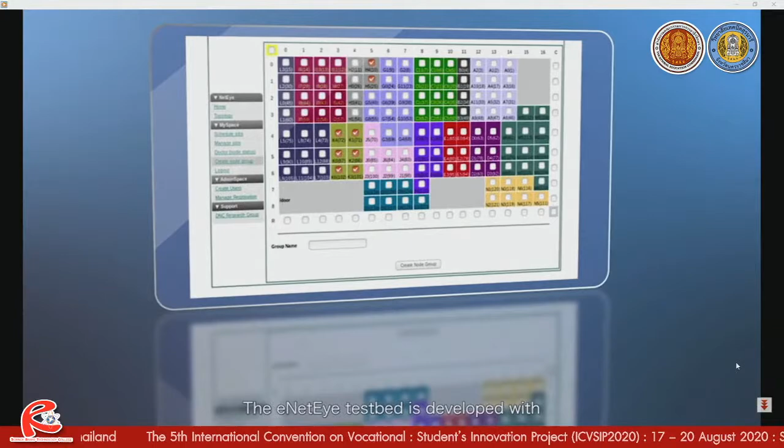More details will be described in the full paper, including eNetEye system architecture and eNetEye control software. In conclusion, the eNetEye testbed is developed with high fidelity and robustness through mechanisms such as very environment simulation capability, more on-chip resources, and more strict runtime synchronization between nodes. Highly integrated web interfaces and other tools are provided to guarantee reliable experimentation.

eNetEye has been running stably for over a year. The eNetEye software has also been successfully deployed in Chongqing University, China in 2020, and it will also be deployed in other universities in the near future.

This is the end of my presentation. Thank you for your listening. Thanks again.

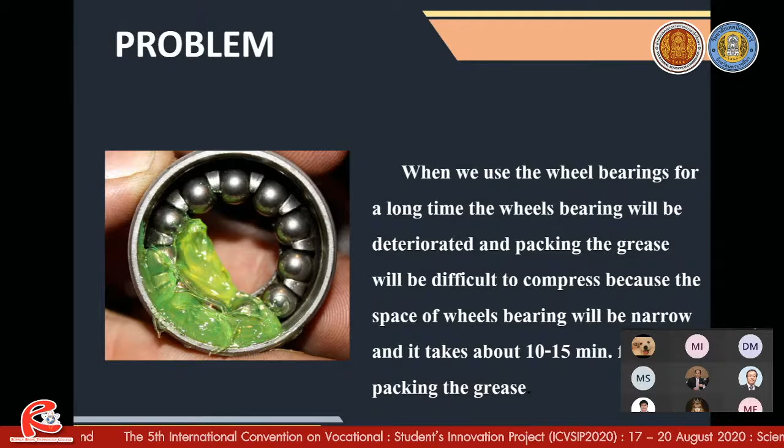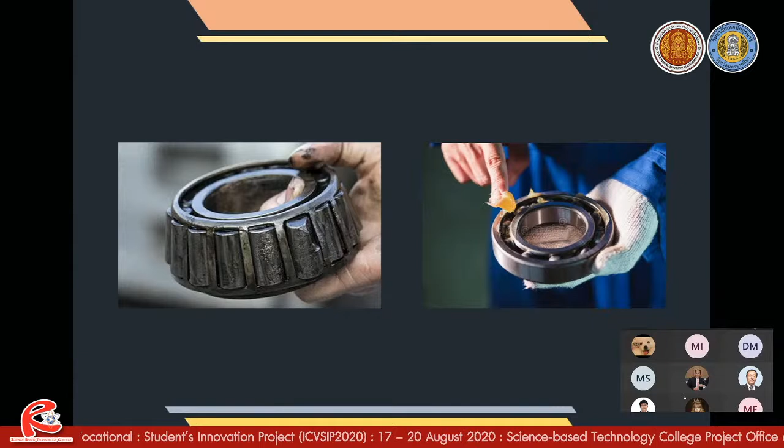According to statistics from Wards Intelligence, there are 1.32 billion cars in the world nowadays. It is undeniable that the car is one of the most important transportation systems in the world. Wheel bearings are one of the most important parts of the car, but to use them, we need to lubricate them. The unlubricated wheel bearing can cause deterioration of the wheel bearing and lead to tragic accidents and breakdown.

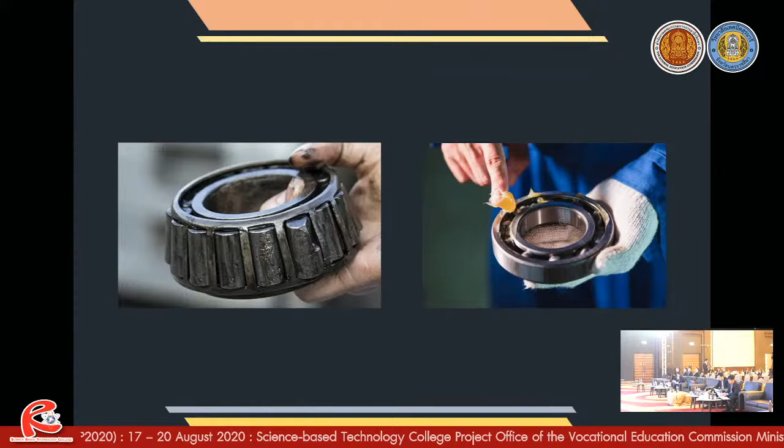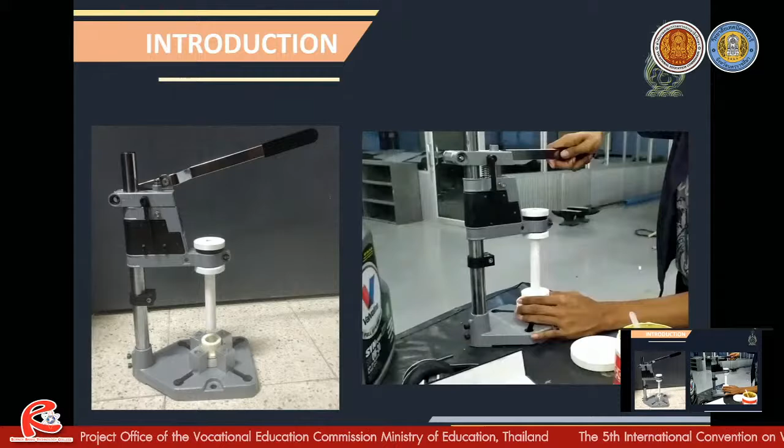But how do we normally pack grease into the wheel bearing? Normally we use our hands, which takes a lot of time and can be a cause of cancer. So we proudly introduce our invention, the wheel bearing greasing machine, that can facilitate our user and make packing the grease into the wheel bearing a lot easier.

Benefits: our invention has a lot of benefits, such as first, it shortens the time for packing the grease. Second, packing the grease will be easier. And third, it's easy to use and more convenient.

The scope of research: first, workpiece. Our workpiece has a size of 15 by 20 centimeters and 40 centimeters height. Scope of experiment: we tested with wheel bearings from trucks, 4-wheel drive and 2-wheel drive vehicles. Scope of location: we tested at Science-Based Technology Vocational College, Chonburi.

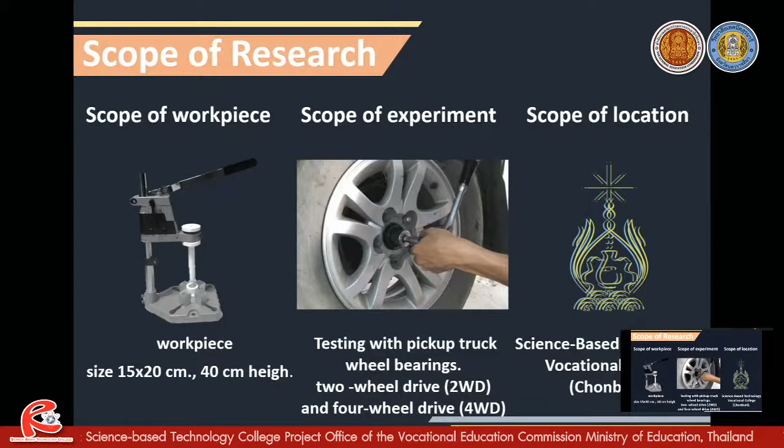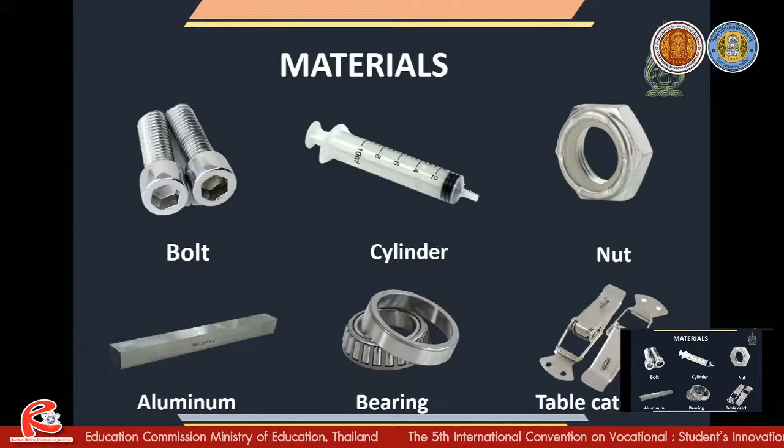So let's see how we built it, with Mr. Siraset Insunthorn. First of all, let's see our materials: bolt, cylinder, nut, aluminum, bearing, and a table catch.

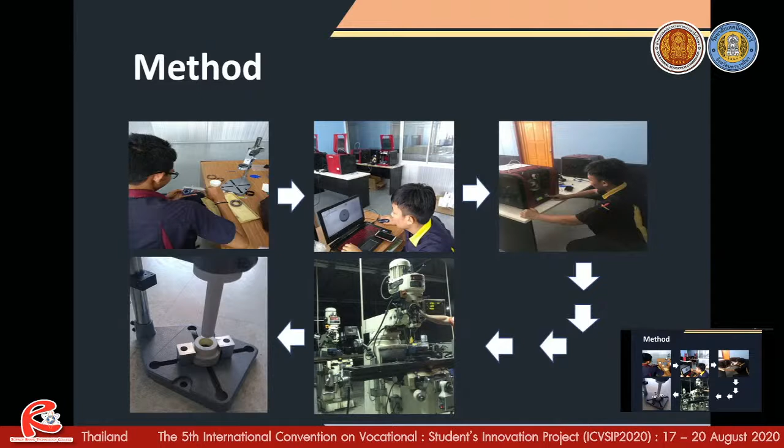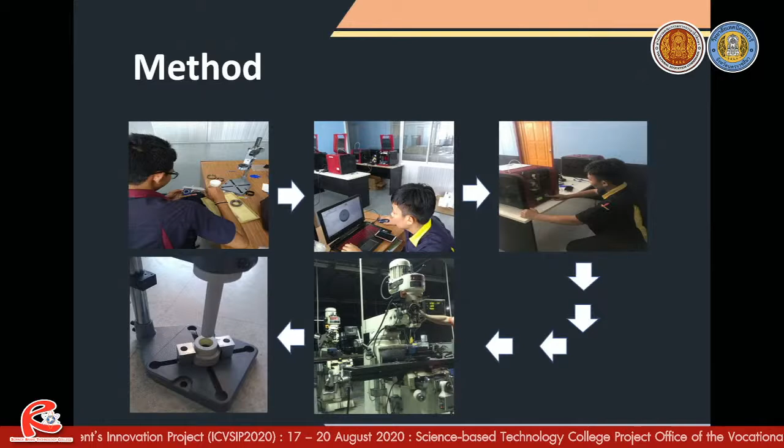Next, the method. First, we measure the wheel bearing with a vernier caliper. Second, we design the wheel bearing grease machine version 2 with the SolidWorks program. Third, we print the parts of our invention with a 3D printer. Fourth, we make the holder for the wheel bearing. And last, we test the wheel bearing grease machine version 2.

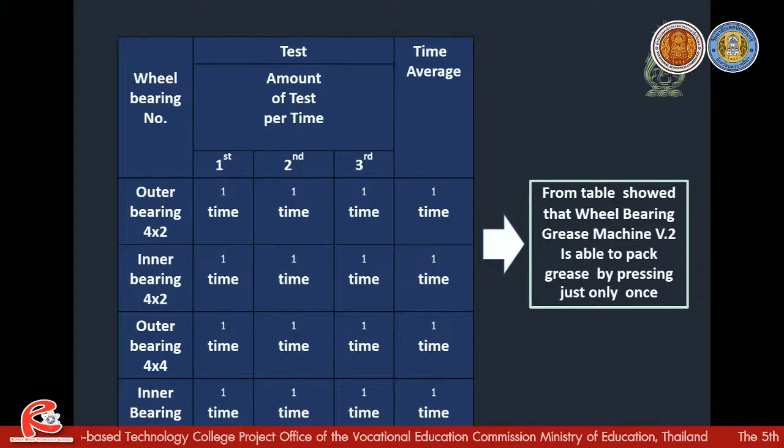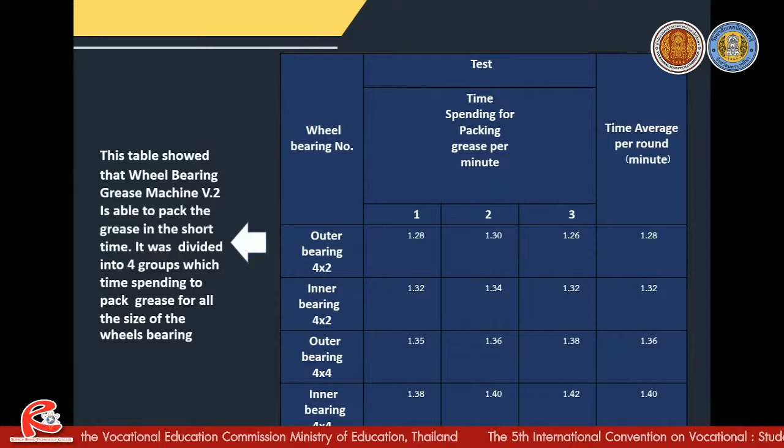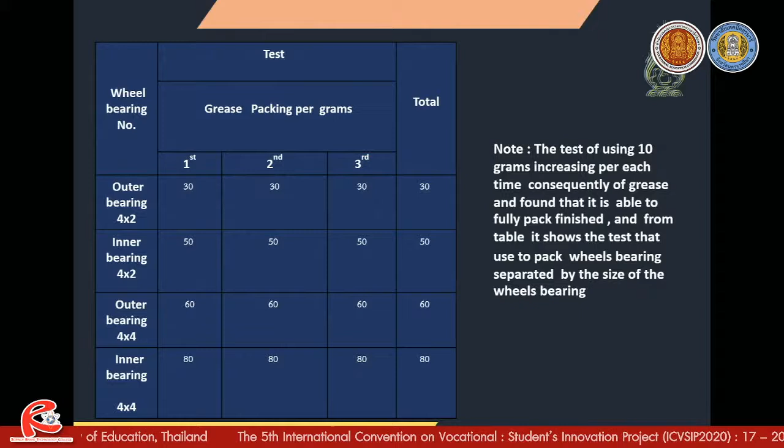Next, this is the table we kept from our test. From the first table, we can see the wheel bearing grease machine version 2 is able to pack grease by pressing just once. The second table shows the average time using our invention to pack the grease, divided into 4 groups of wheel bearings. And the last table shows that we put 10 grams of grease per each time to find the amount of grease that can fully pack the wheel bearing.

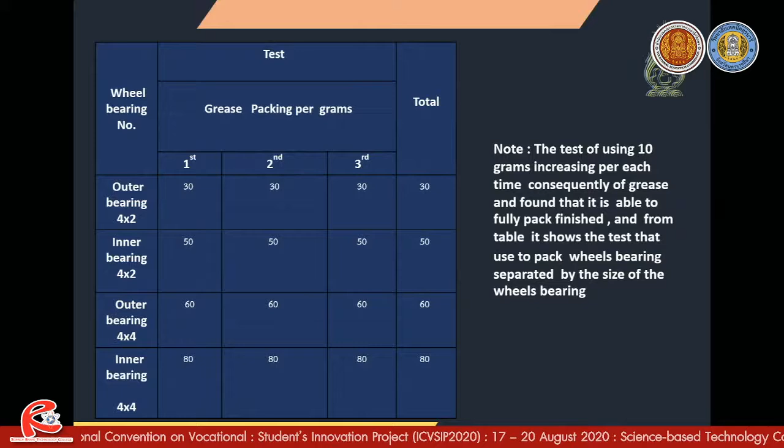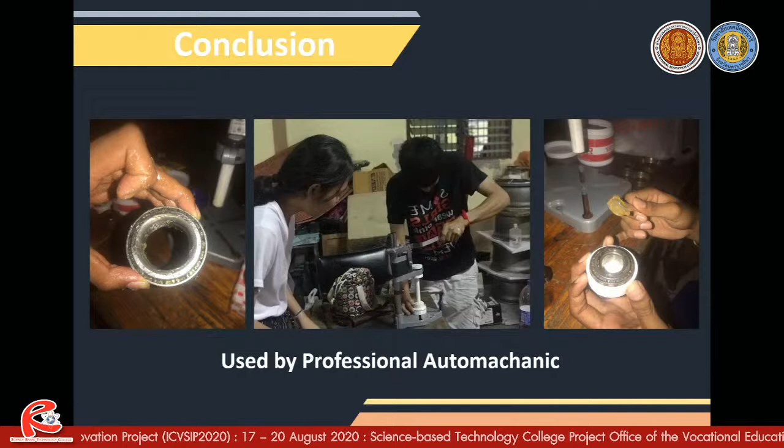To make it the perfect invention, we brought our invention to be tested by a professional auto mechanic at a local garage in Pan Thong City, Chonburi. The feedback from him was that our invention can save a lot of time for him in good condition and can really facilitate him.

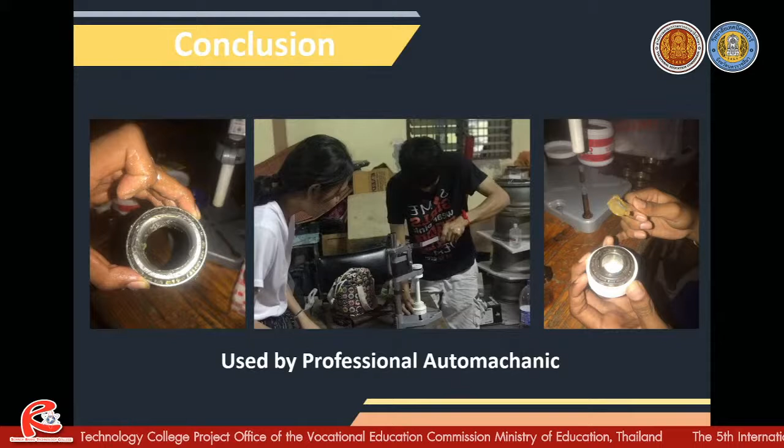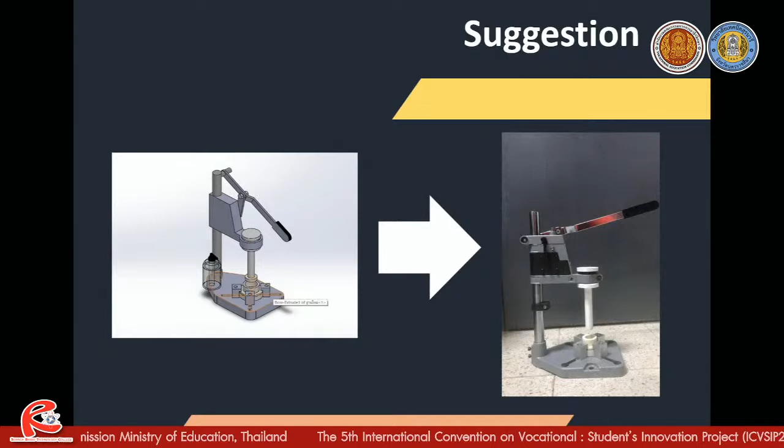As a suggestion, if we have more budget and more time, we would like to continue developing our invention, because invention cannot stop. So we're going to put in a hydraulic system and an automation system to make it more facilitating and easier to use. Thank you for your attention.

Okay, thank you very much for your presentation. Do you have any comparison in terms of the time for working, compared between doing it manually and working by using your invention? Because in your table you show only the time that you use with your equipment.

Okay, so for the time used to pack the wheel bearing: first, if the person packing the grease into the wheel bearing is a non-experienced auto mechanic or a student, it will cost about 5 minutes. And if they were an experienced auto mechanic, it would take 2 or 3 minutes. But with our invention, it costs only 1 minute 30 seconds on average. So it can save a lot of time.

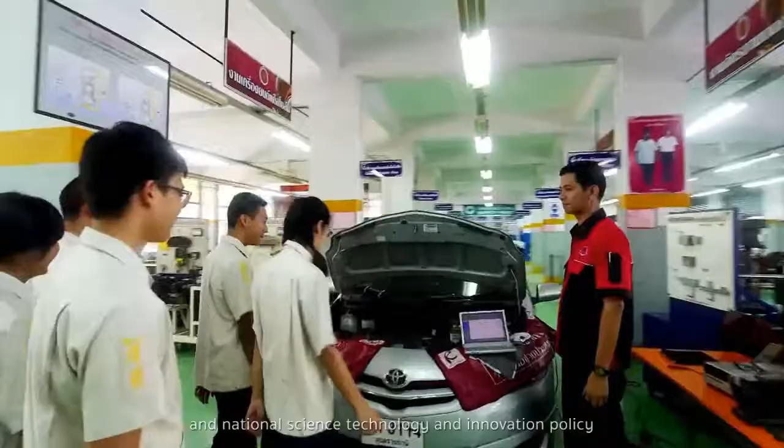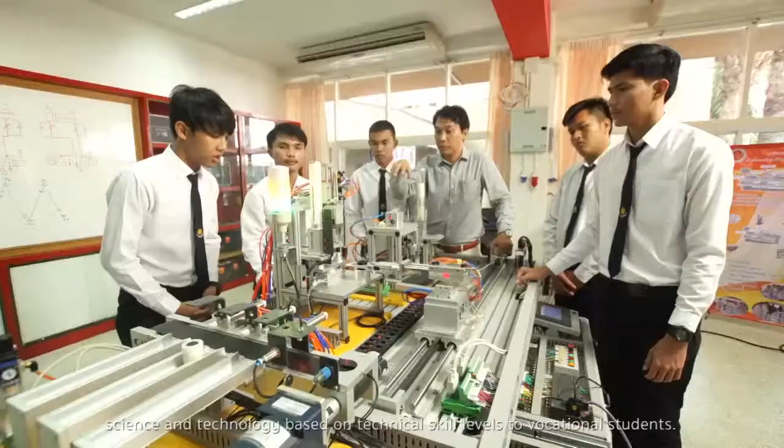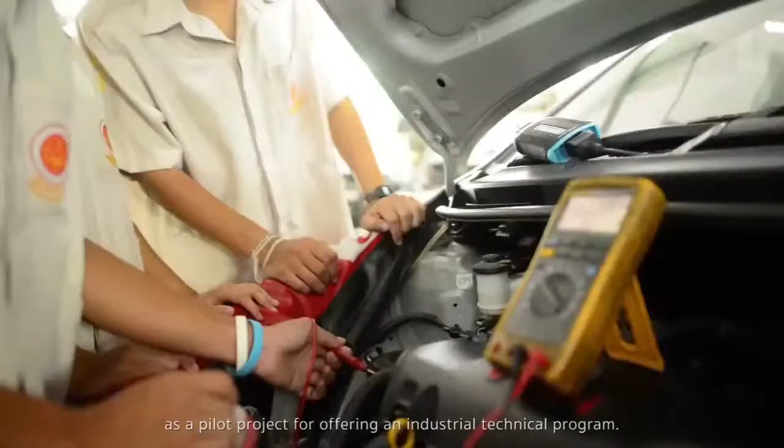Since 2008, the Office of Vocational Education Commission and National Science, Technology and Innovation Policy have developed a new project delivering excellent innovative science and technology based on technical skill levels to vocational students. In response, the Technical Vocational College in Chonburi Province was first implemented as a pilot project offering an industrial technical program. In 2010, this project was extended to 4 technical colleges.

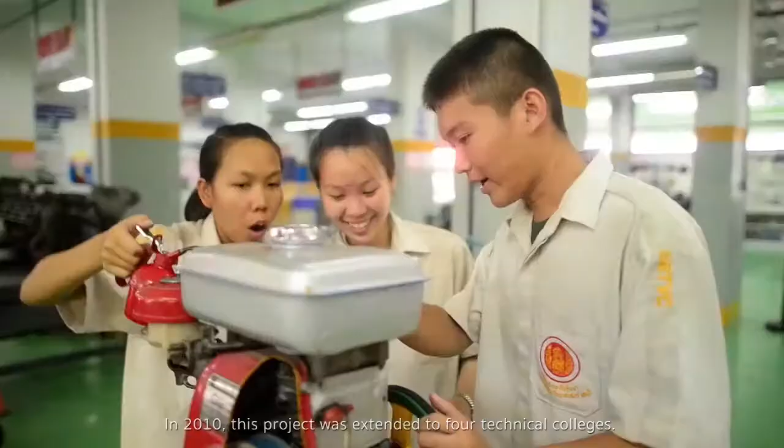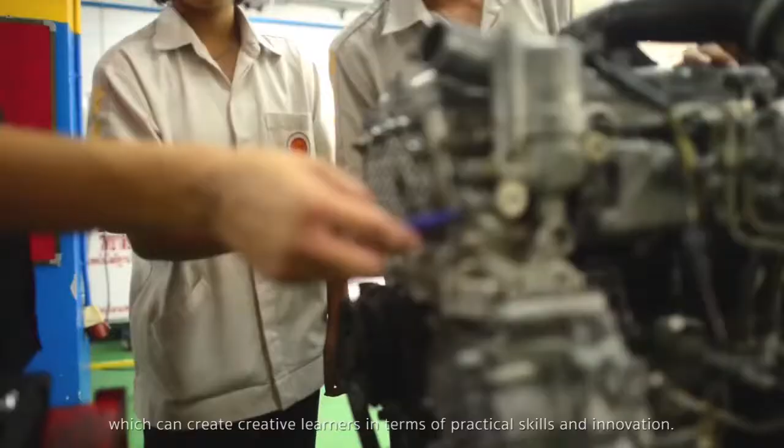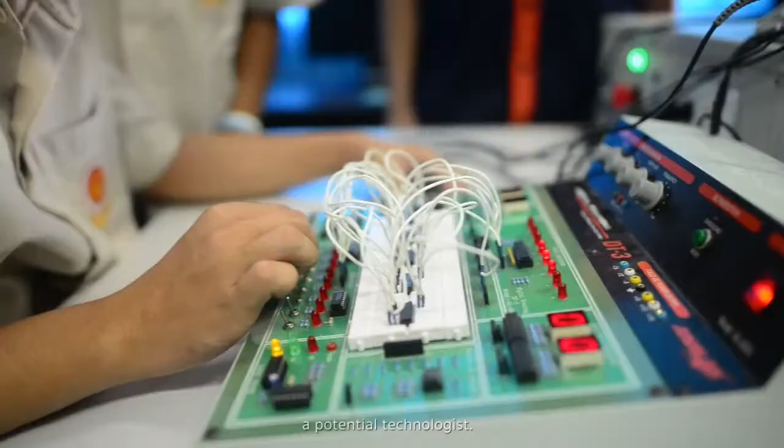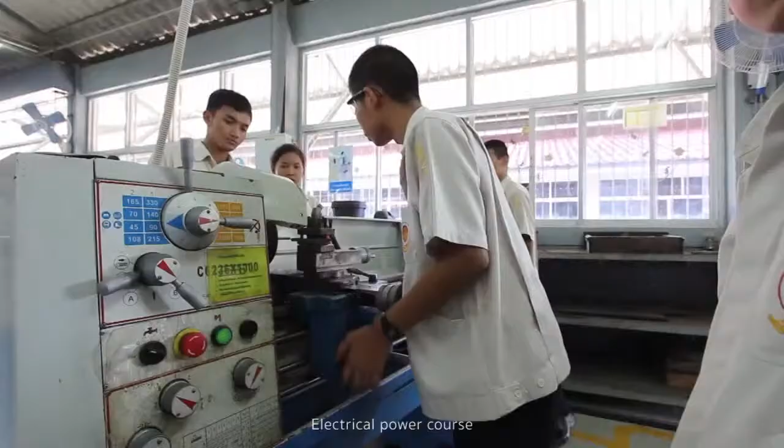Chonburi Vocational College: we believe that genius in technologies can build. This college provides vocational knowledge combined with science and technology, creating learners with practical skill and innovation. The college aims to produce students who become young inventors and ultimately potential technologists. Open courses include science-based industry technician courses: automobile, electrical power, machine tool, automation, and electronic courses.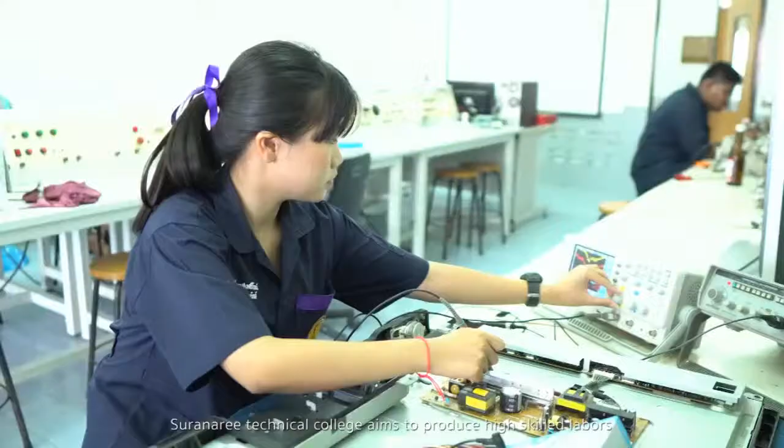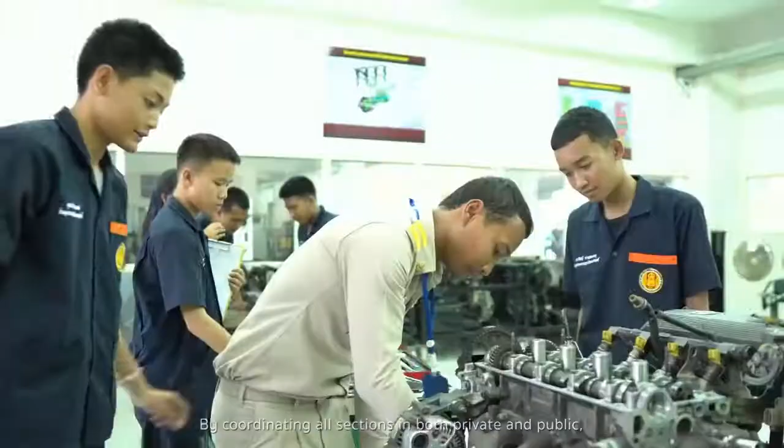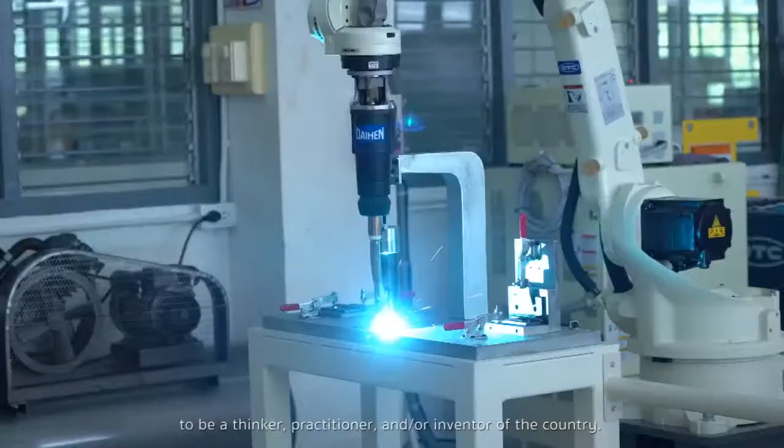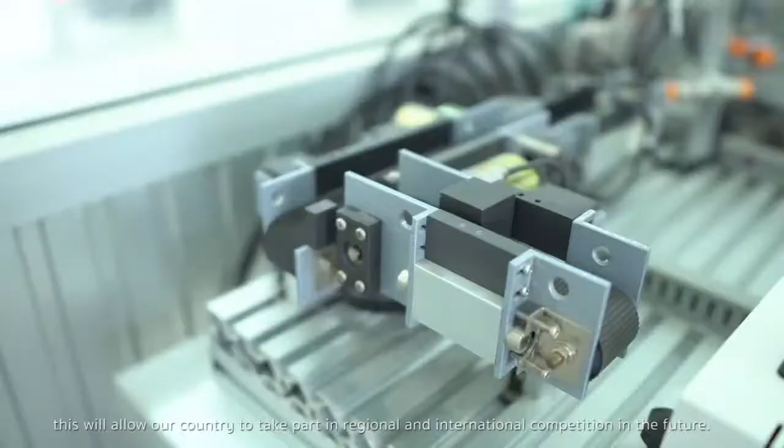Suranaree Technical College: good practice comes with morality and skill proficiency. The college aims to produce high-skilled laborers and technicians with technology at an international level, providing modern technology in regard to the sufficient economy principle from King Rama IX. By coordinating both private and public sections, this college collaborates with Suranaree University of Technology in developing industrial manpower to be thinkers, practitioners, and inventors for the country, with the highest morality, ethics, honor, and responsibility, allowing the country to compete regionally and internationally.

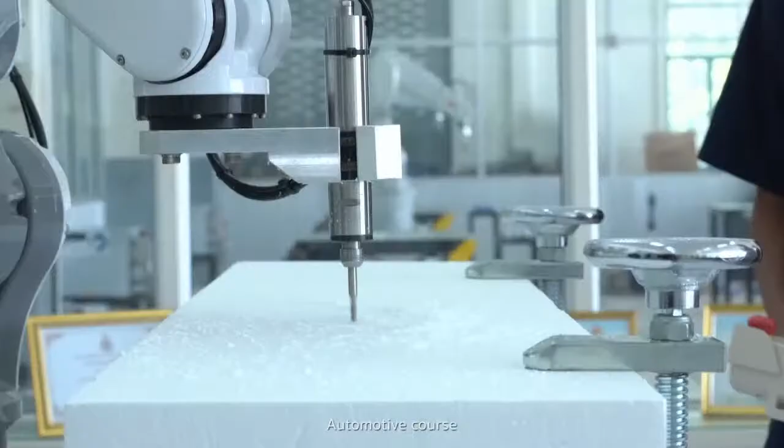Phang Technical College: excellent skill, remarkable knowledge with morality. Phang Technical College aims to develop science and technology combined with vocational skills. The college builds novel innovations for enhancing the nation's technological capability in tourism industry and service. This innovative vocational education paves the way to a complete project-based learning process, bringing remarkable quality to learners across all vocational education colleges in the country, resulting in the vast development of the nation. Open course: science-based commerce and services, tourism technology.

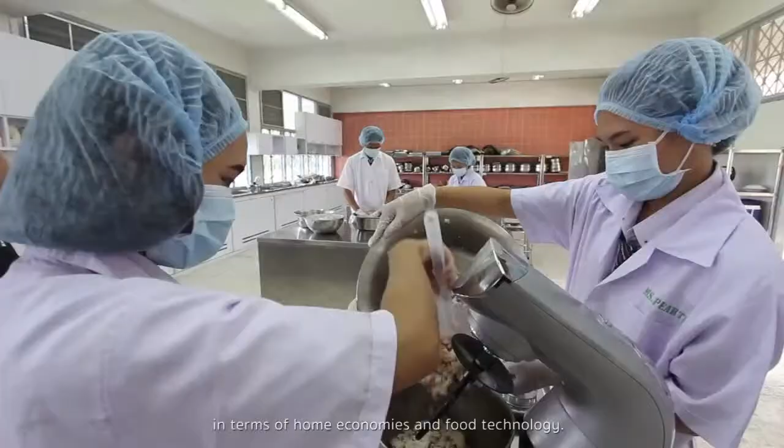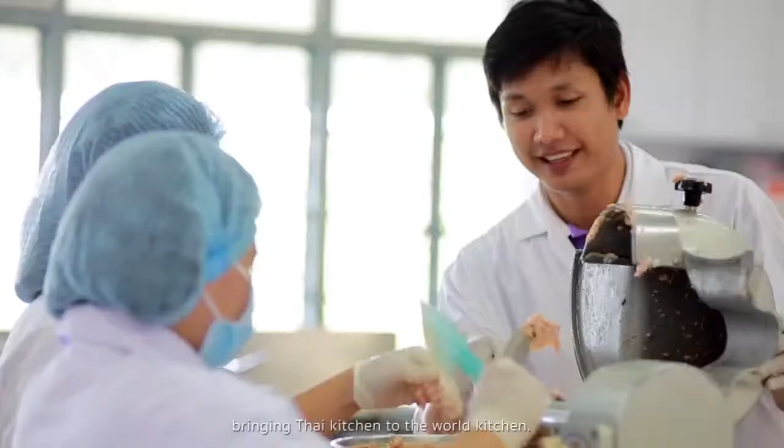Singburi Vocational College: smart thinking, smart doing, smart creating, and smart managing for developing Thai kitchen towards world kitchen. The college aims to develop professional manpower in food processing technology combined with science and technology, as well as the sufficient economy principle from King Rama IX, with cooperation from Rajamangala University of Technology Thanyaburi. The college aims to produce excellent vocational students in home economics and food technology, an important factor of basic human needs. We build from basic skill level towards technical level with excellent quality and potential using science and technology, creating professional students who can think smart, do smart, perform smart, and manage smart, bringing Thai kitchen to the world kitchen. Open course: science-based home economics, food processing.

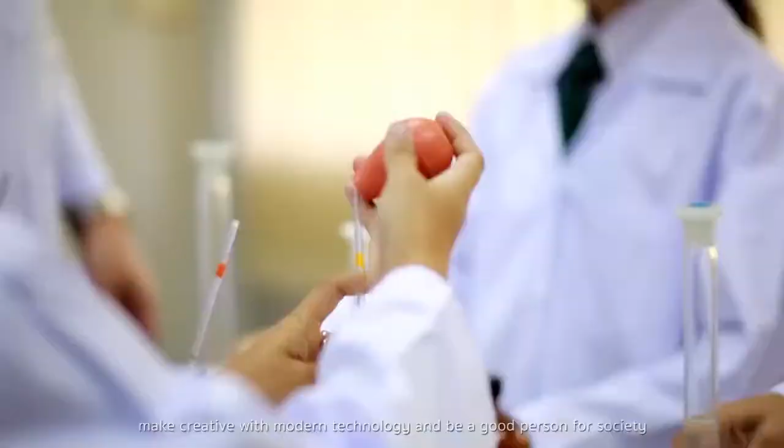Lamphun College of Agriculture and Technology: love learning towards proficiency, create with modern technology, and be a good person for society. This college is a learning organization aiming to develop professional bioagriculture manpower with high international quality, delivering service to communities, in regard to the sufficient economy principle from King Rama IX. The college expects graduates to serve the community and be leaders in the bioagricultural field. Open course: science-based bioagricultural technology.

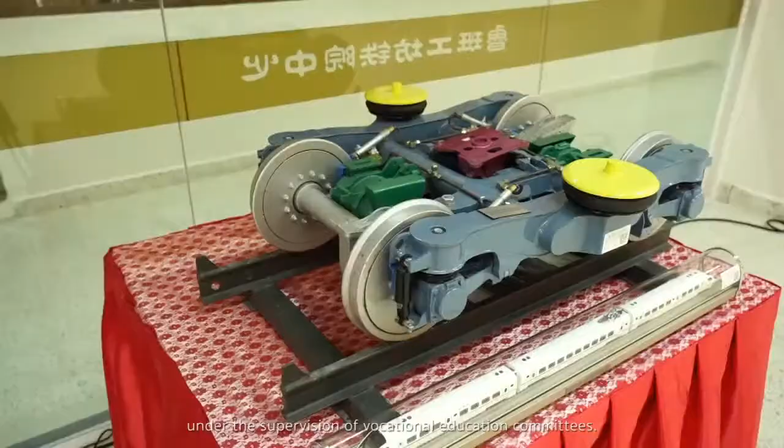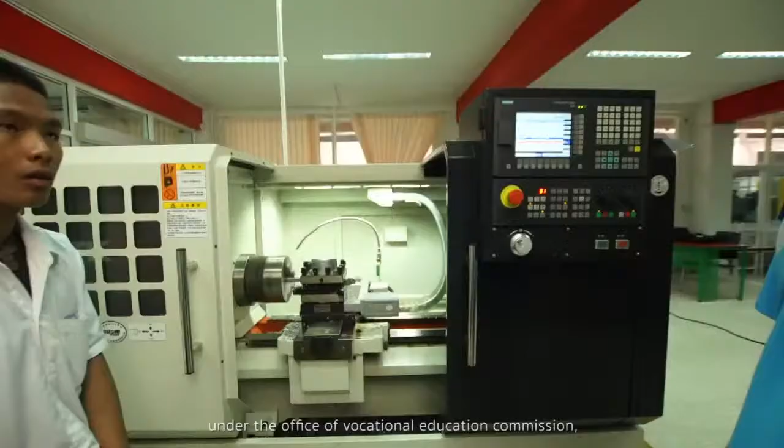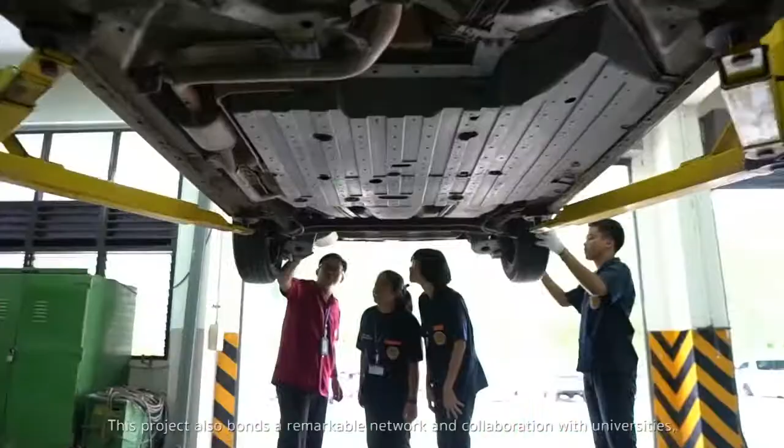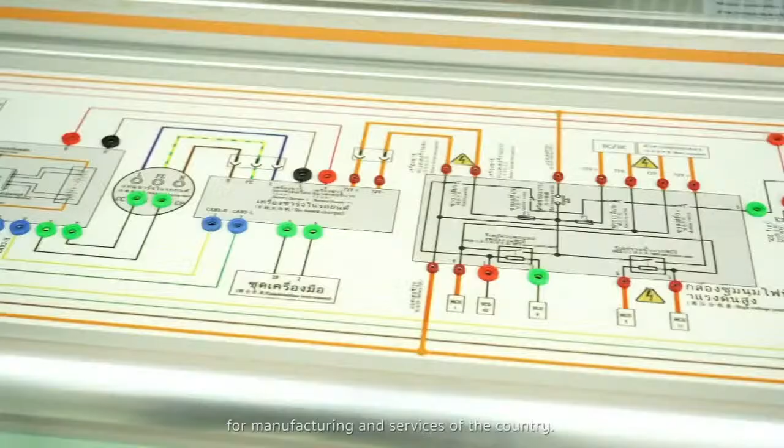The Science-Based Technology projects are designed for vocational certificates under the supervision of vocational education committees. The Science-Based Technology College is an extraordinary classroom under the Office of Vocational Education Commission, assisting potential students in pursuing innovation and technology. This project is arranged as project-based learning and STEM education, combining scientific and technological knowledge into technical and professional skills. It also builds remarkable networks and cooperation with universities, science agencies, and enterprises, creating professional, innovative, and excellent technologies in science, engineering, mathematics, and technology for manufacturing and services of the country. We build technologies for creating innovations.